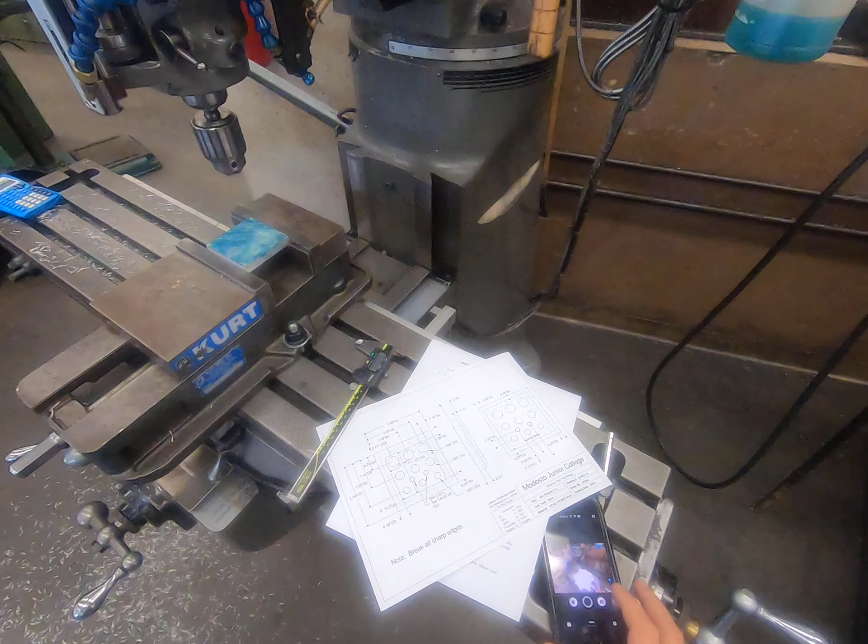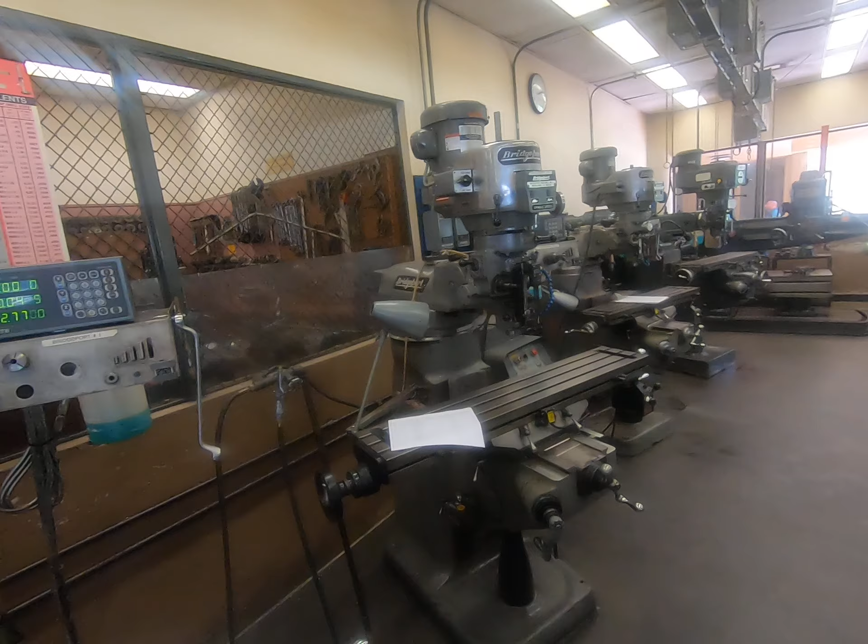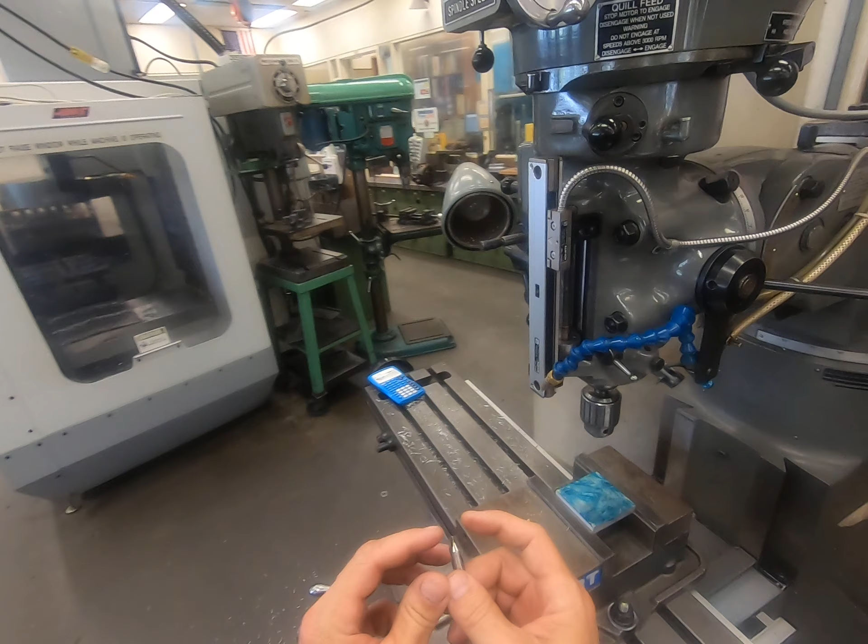As I was saying, we used the center drill on the big drill press when we drilled our hole in the plate. We're going to do the same concept right here, right now. So before we do any drilling, we're going to center drill first. When you center drill, you go through that pilot and about halfway into the tapered section.

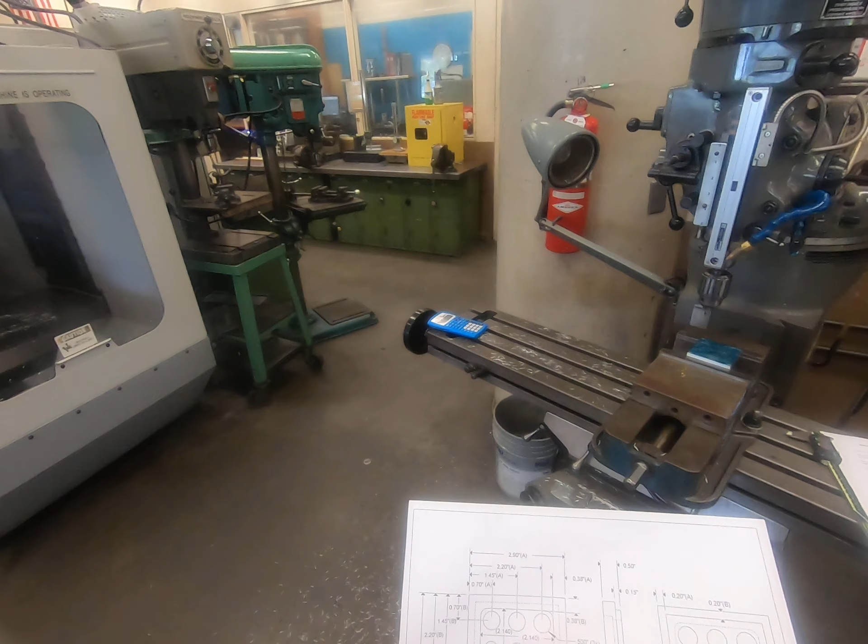I can hold this right in the drill chuck. Lock that down good, and now we're going to go to our first hole location. We can pick and choose however we want here. We're going to center drill all 9 of these holes, all of these. We could start down here and work our way back, or start in the middle and go out and come back down here. It really doesn't matter. I'm just going to start like the drawing does, in this corner, and work my way across, then come down and do them like that.

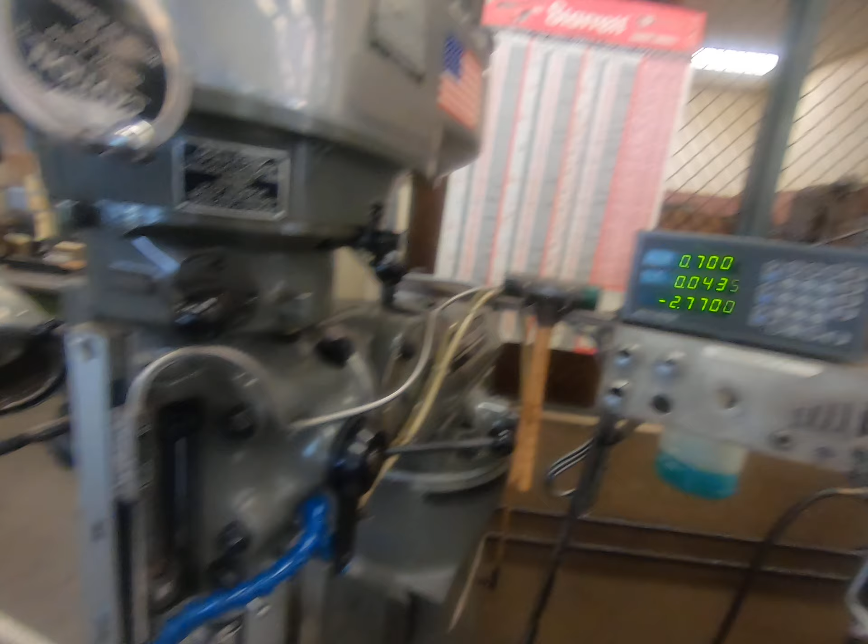My first location according to the drawing is 700 thousandths over and 700 thousandths down. So what I'm going to do right now is go over 700 thousandths on the digital readout, roughly there, and then on Y, come down 700 thousandths. We're going to do the same thing.

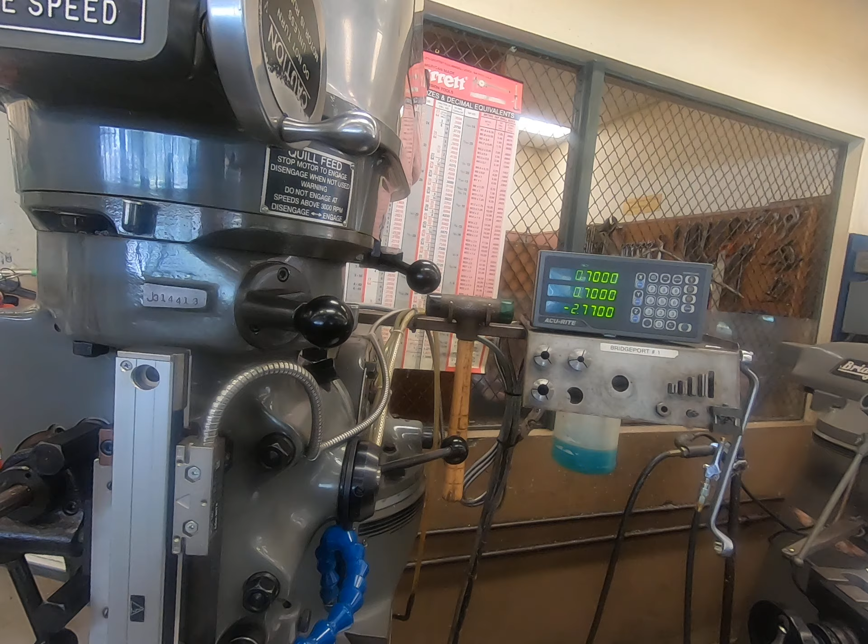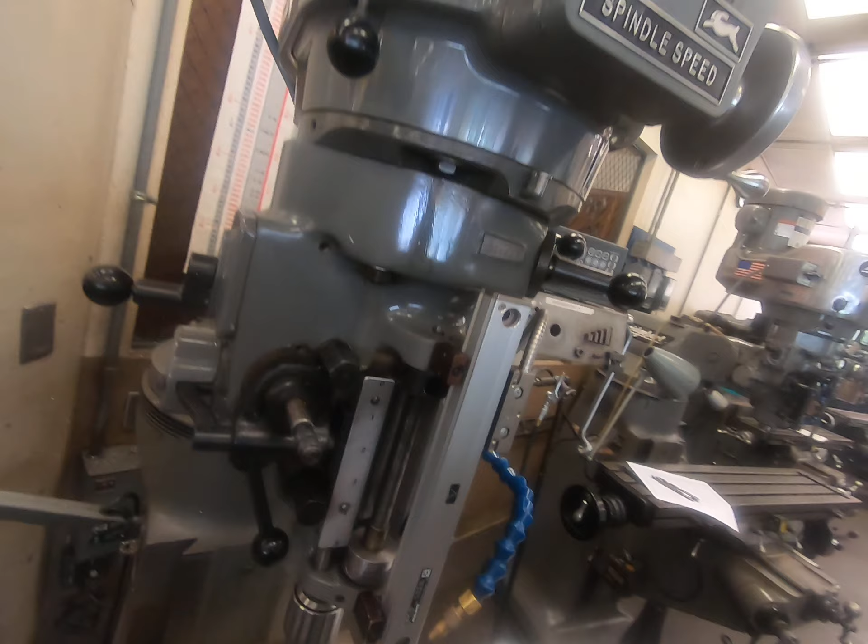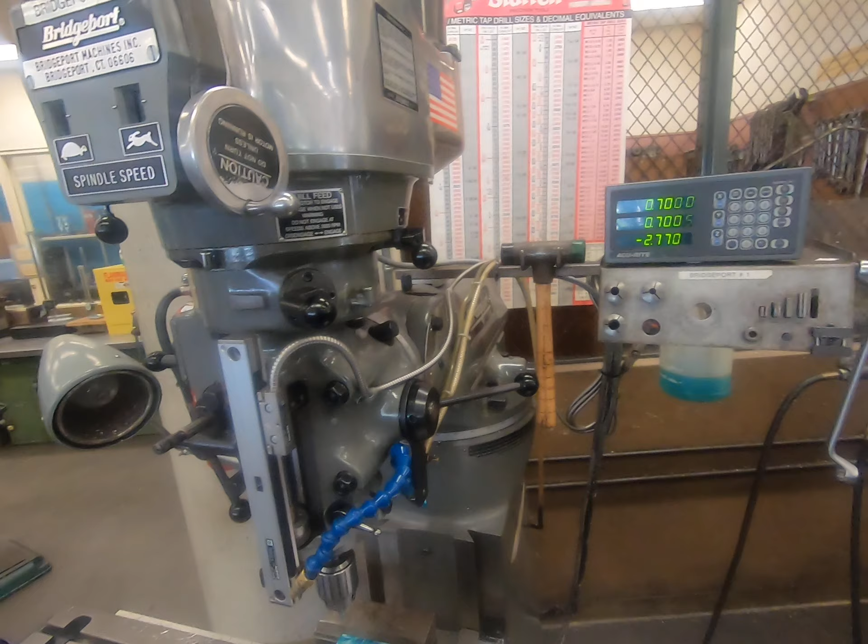Now, this is where if you wanted to, you can use your axis locks. So I can lock my X-axis down and my Y-axis. A lot of times when you lock it, it will jump like that, 5 or 10 tenths. If you're really crazy, you can go back and try to loosen that up and adjust it. So when you lock it, it locks right at 700. For me, I don't lose sleep about a half thousandth being off. If I was boring it right now, I might be more critical of it, but for drilling, we're 50 thousandths small anyway.

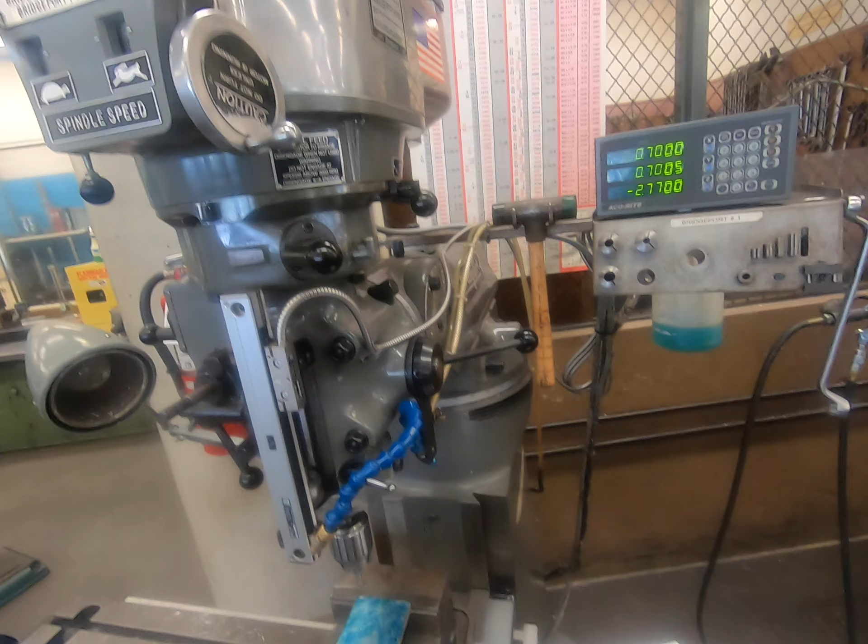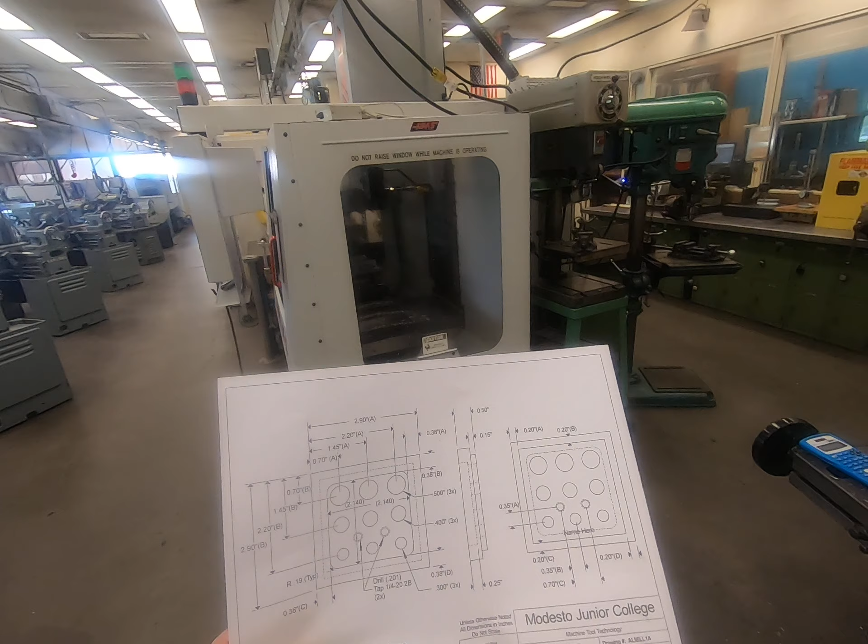I didn't explain that. The reason we're drilling these all 50 thousandths small is that the tolerance on these is a 3 decimal place tolerance, and on this blueprint, that's plus or minus 1/1000th of an inch. That's very tight, very hard to hit. That definitely cannot be hit by just using a regular drill bit. You're going to need a different operation than that.

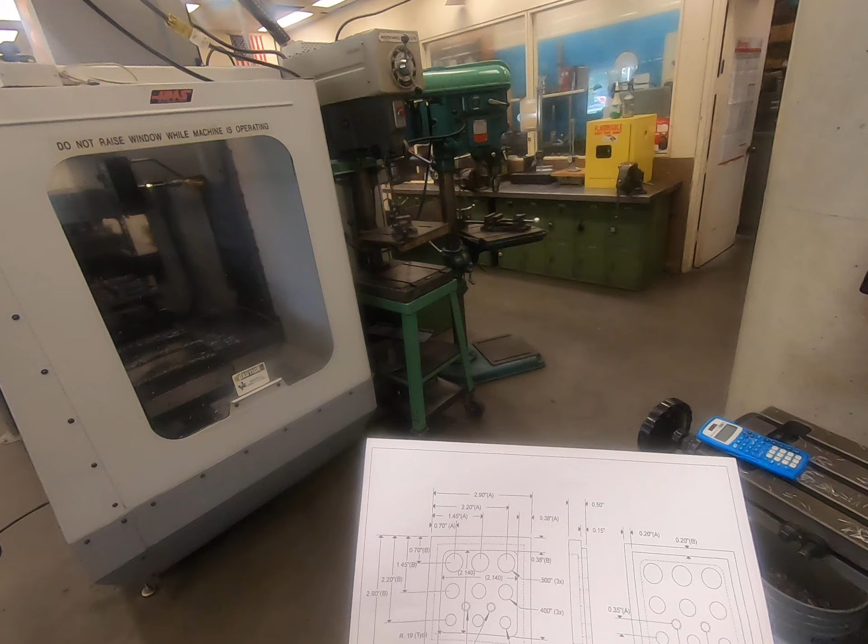In our scenario here, we're going to go through and bore each one of those holes out. That's why I'm leaving 50 thousandths small, so I can take that material out with the bore bar. That'll be the next operation as we go through here. So right now we're just drilling it - this is basically a roughing operation to create a hole in the location where we want it to be.

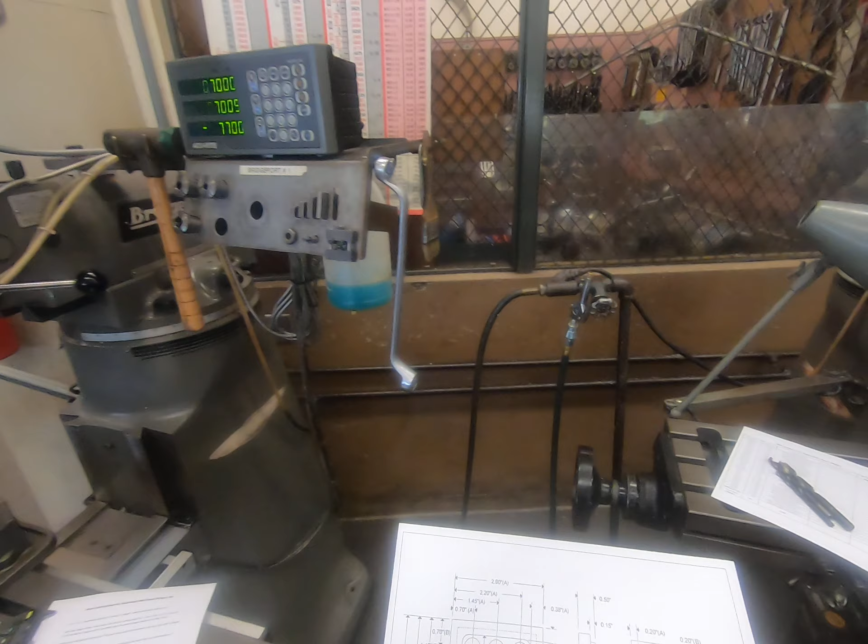If we were off on location right now a little bit on X or Y, even up to 5, 10, even 15 thousandths, it's not going to affect us much, because when we bore it, as long as we have it perfect then, the bore is going to create its own location - it's not going to follow that drilled hole. It's going to create its own orientation. So right now this is a roughing operation, making it a little small. We're going to come back and bore it out after.

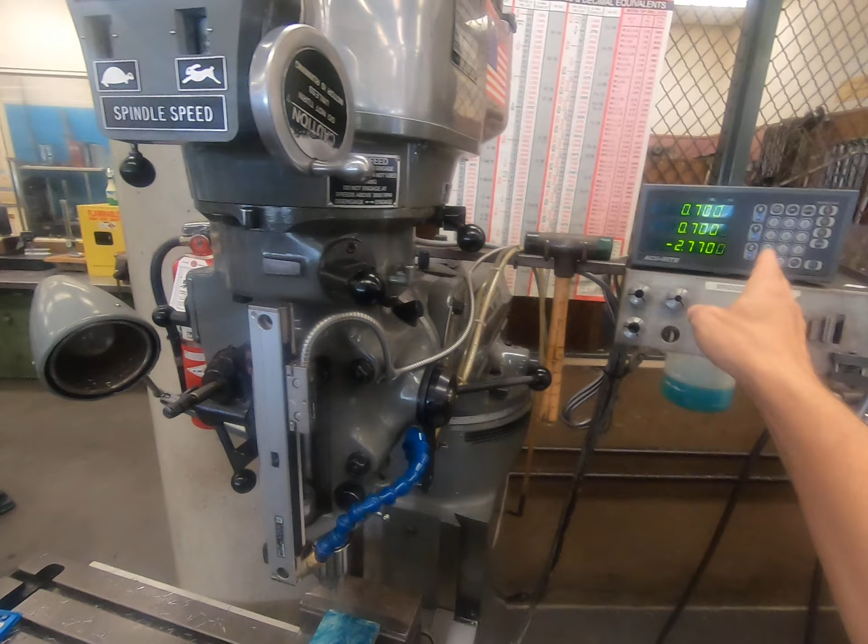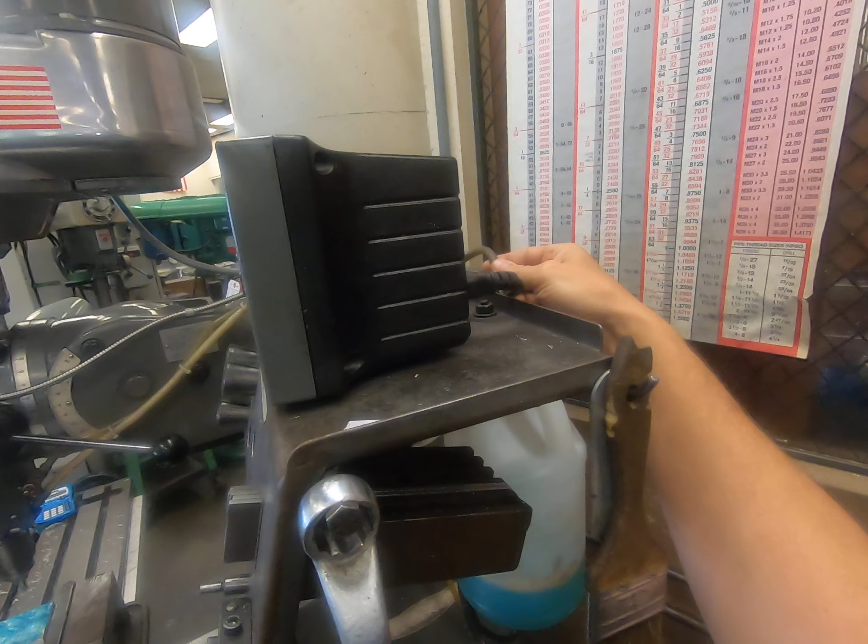For starters right now, I'm going to keep that close, because I'm going to need those numbers. So I'm going to 700 thou and 700 thou, and again, I'm not going to lose sleep about that, so I'll just leave it there. Turn this on, got some coolant. Potentially I'm getting a little low here in my tank, so it might not be drawn out. There we go, all right, we're getting some mist.

Oh yeah, I didn't show you this - one other thing is, remember the crosshair we put in there? Right now, that drill should follow along with that crosshair. Even if it looks like it's off, and it kind of visually looks like it is, don't trust it - that scribe line is not nearly as accurate as what this edge finder gets to. When you edge find and set the location like we did, we are within probably 1/1000th of where we want to be. It is very, very accurate. That scribe line is just a scribe line - it's not a perfect scenario. So the only reason I'd even have you scribe this at all is just for this.

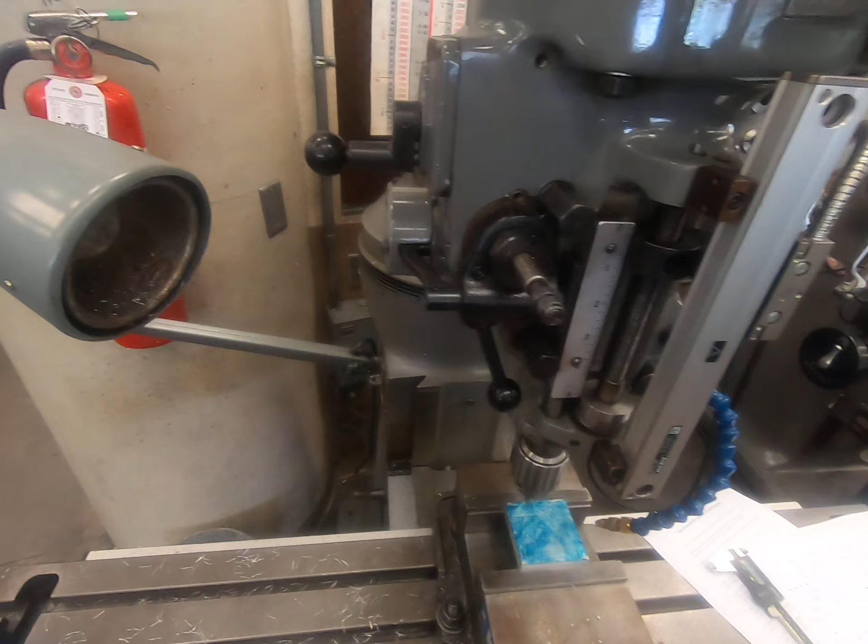A lot of times people forget to compensate for the diameter of the edge finder, and they don't move in that 100 thousandths. If you were to come here right now and see that your tool was off by basically 1/8 of an inch, it would be a red flag like, whoa, I did something wrong. That's the only reason I'm going to tell you to scribe even one hole. Otherwise, I believe in that edge finder way more than any of those scribe lines. Those are just there for moral support, you could say.

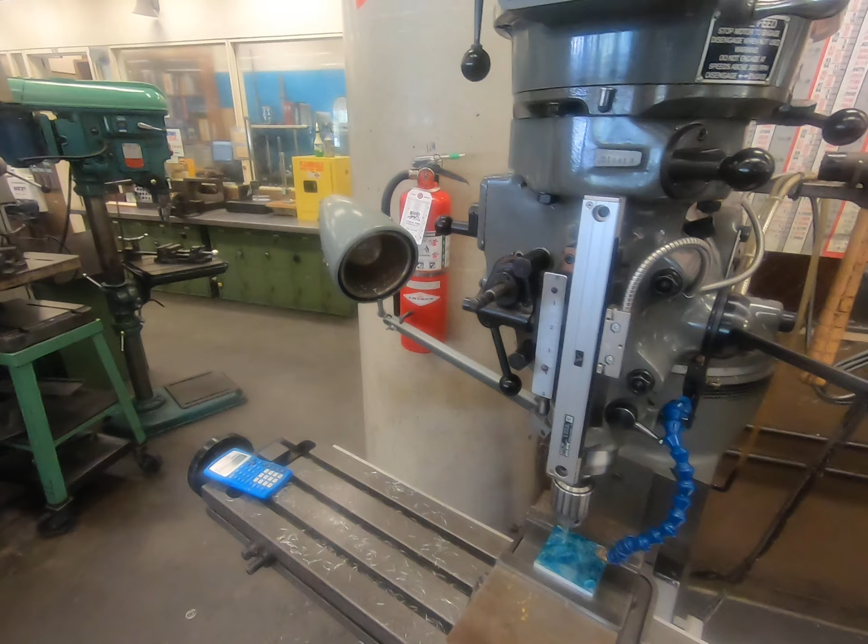So, all right, we're going to drill. RPM on this, I'm at 1,000 right now. For center drilling here, I'm not going to worry about it, that's fine. I could probably go faster if I wanted to, but this will work for what we're doing.

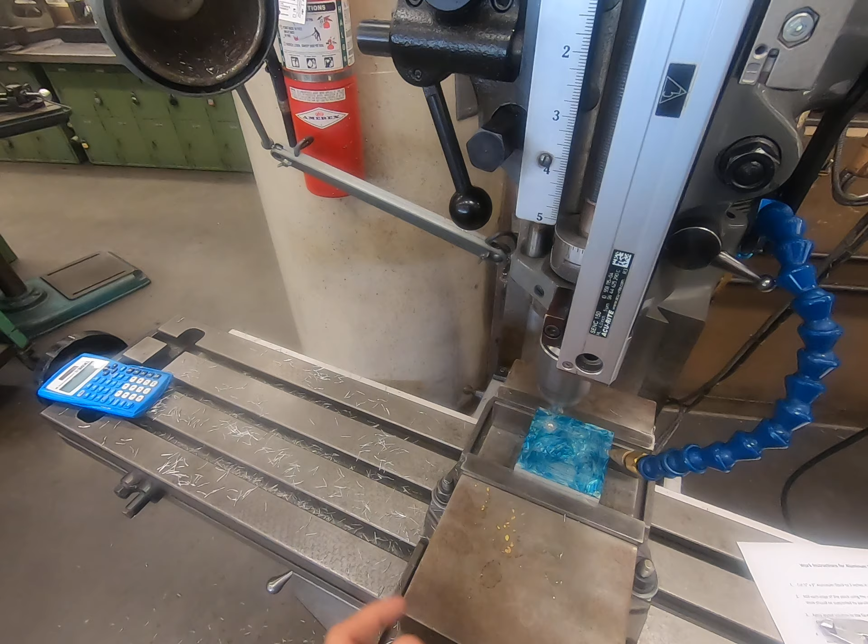There, I just went down. You can see I created a little bit of that chamfer, and that's as deep as I want to go. So I want all my holes to look like that. Now I just follow the orientation my blueprint says.

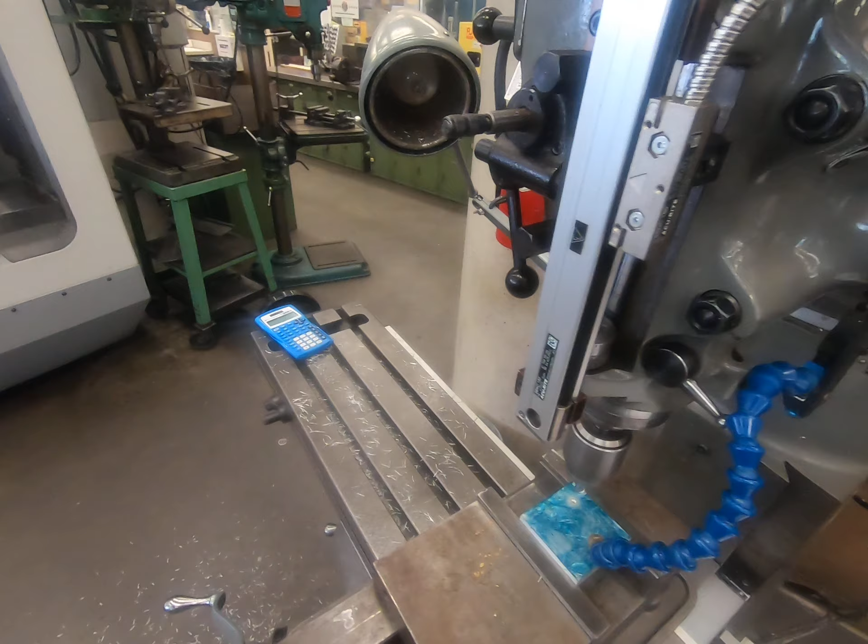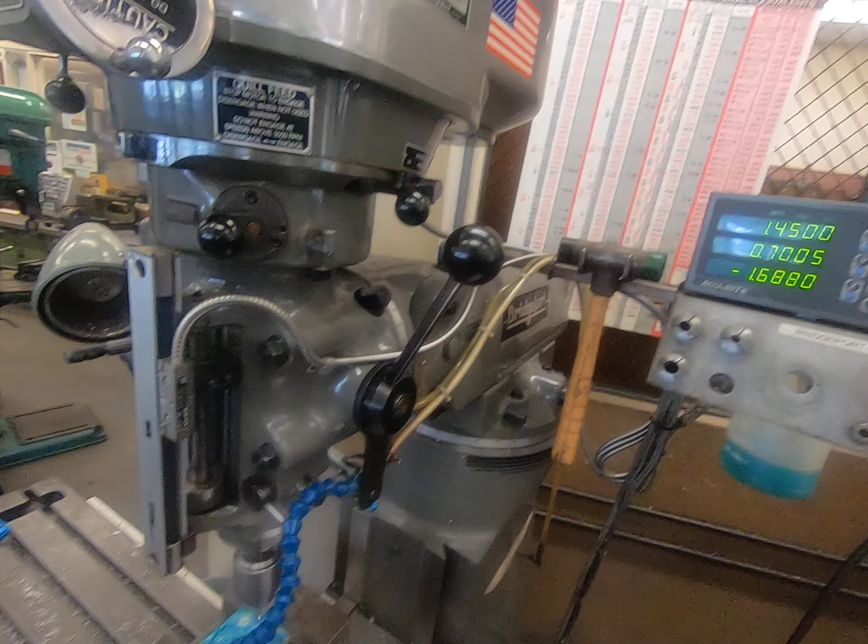The next hole is still 700 thousandths down, and 1 inch 450 thousandths over. I'm going to move my x-axis, unlock it, and move it over to 1 inch 450 thousandths. For what we're doing here, I'm not that worried, so I'm not going to lock each axis—you can if you want to. Matter of preference, it's not going to change much for what we're doing.

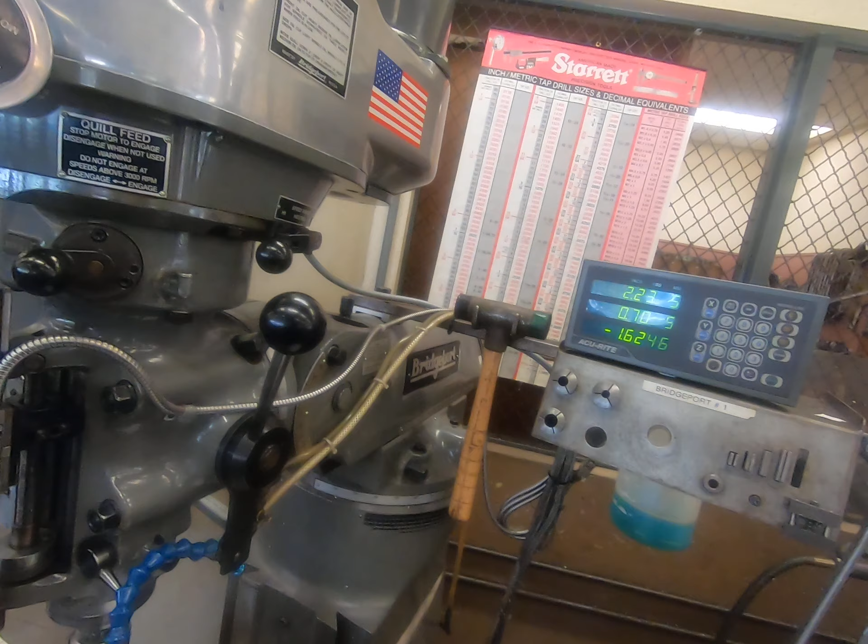So, 1 inch 450, I'm going to center drill again. A little deeper that time, but not a big deal. This time we're going over to 2 inch 200 thousandths, so I go to 2 inch 200. There we are.

Center drill again. Now I'm going to move down on the y-axis. I might as well stay at my same location because these are all in the same plane on y and x. So I'm going to stay at 2 inch 200, but move my y down to 1 inch 450 now. I'm going to loosen this up, go to 1 inch 450, and center drill again.

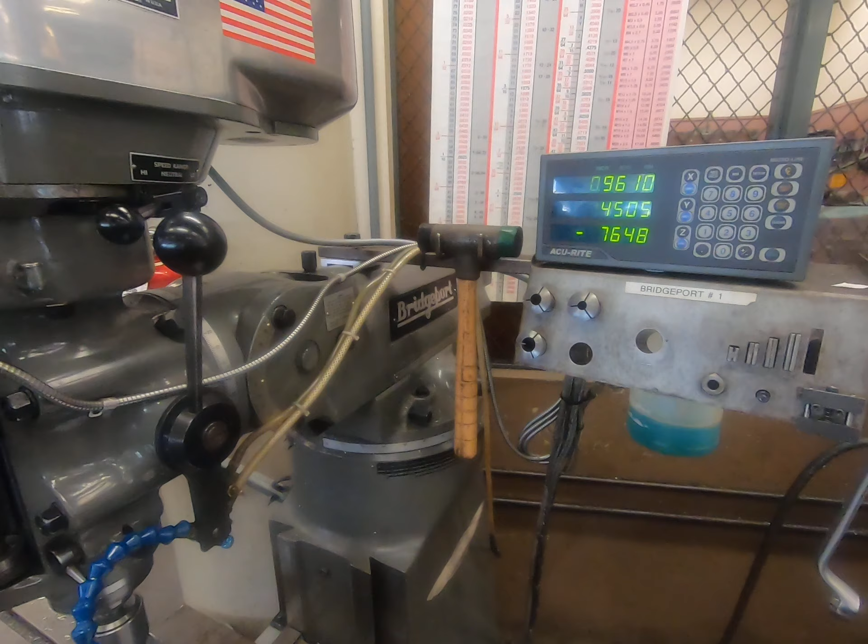Now I'm going to go back to 1 inch 450. And there we are, center drill that one. Then we're going to go to 700 thousandths again on X. It's beautiful edge finding because you can go to the exact numbers in your blueprint—no guesswork, no compensation, nothing—as long as you have it edge found correctly. Now we're coming down on Y, and we're going to go to 2 inch 200 thousandths on Y.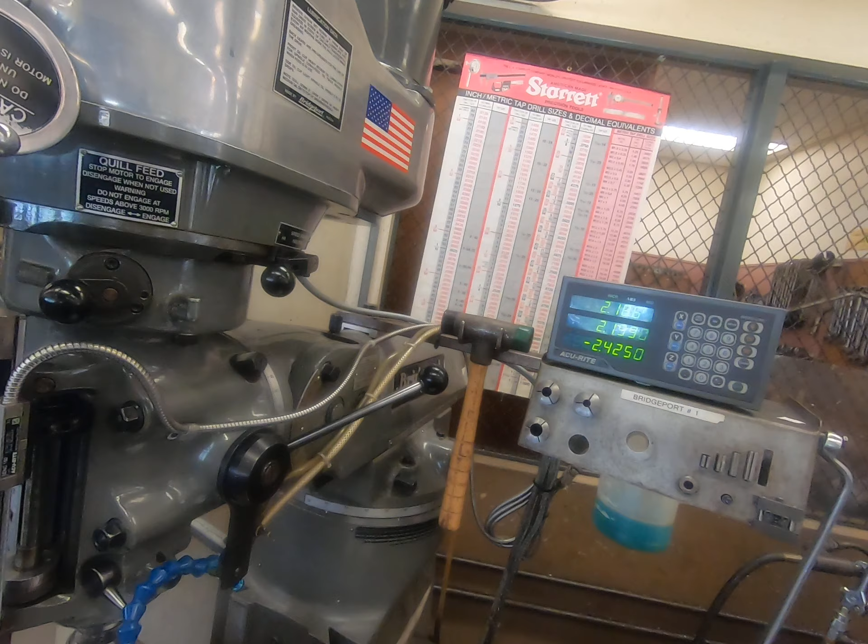So there we are, drilled there. Then we're going to 1 inch 450 on X. From there, finally we're going to end at 2 inch 200 and 2 inch 200. And that other one moved just a little bit on me now—again, that'll happen, a little foul, not worried about it. Try to get a little closer.

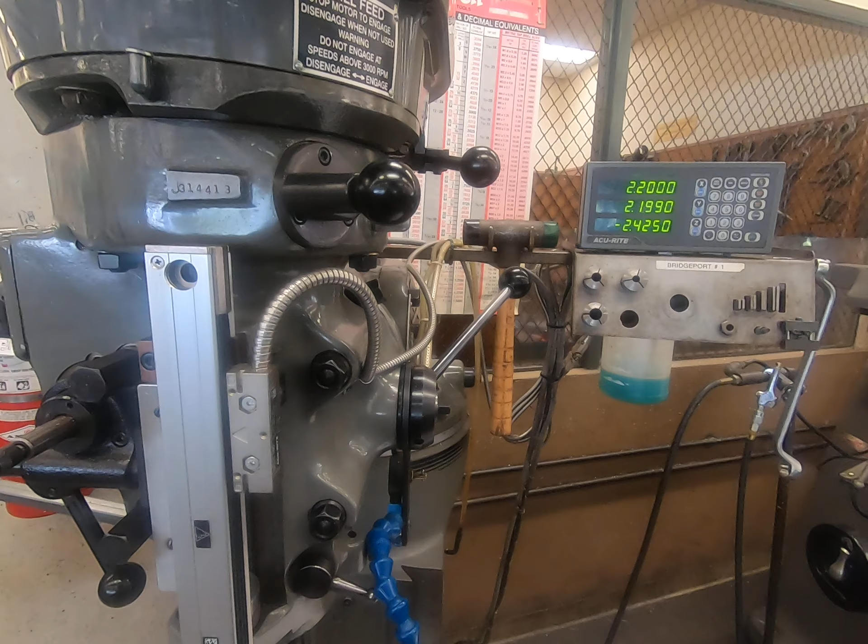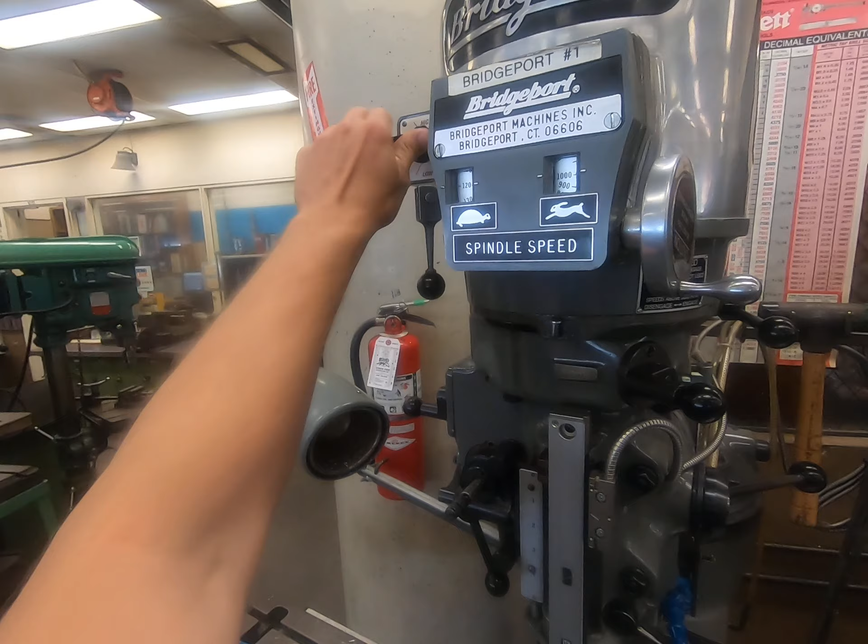All right, there we go. And down we go. So we went through and center drilled all of our holes. Now that's a guide for that drill to follow. So when you go to drill this, your drill is going to fall right into that little pocket, and it's going to guide that thing right through there, making your drill come out very close to size. So we're in location right now for the smallest holes, which are 300 thousandths.

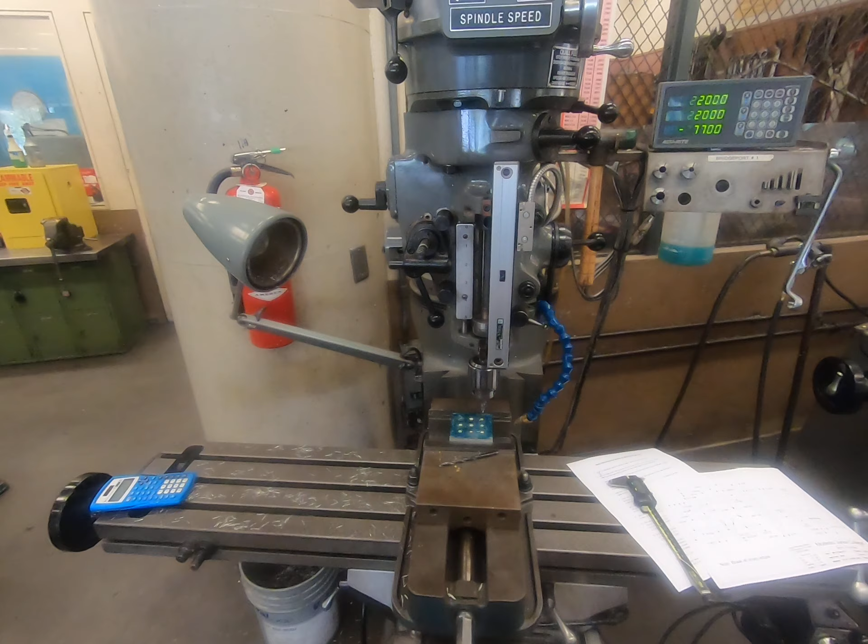Which we're going to drill at 250. So I'm going to start with this drill, and we're going to knock out each one of these holes. It's always a good practice to go through—if you center drilled this part, you should go through and drill it in the same work holding.

If you were to go right now, and the buzzer goes off, time to leave for the day, you pull that part out and put it back in and edge find it all—sure, you're going to get it very close, but you're still going to be off a little bit. Whenever you put a center drill into place, it's nice just to get that drilled hole right through in the same clamping and the same zeroing on the DRO, just to ensure you're perfectly there. So it's just good practice.

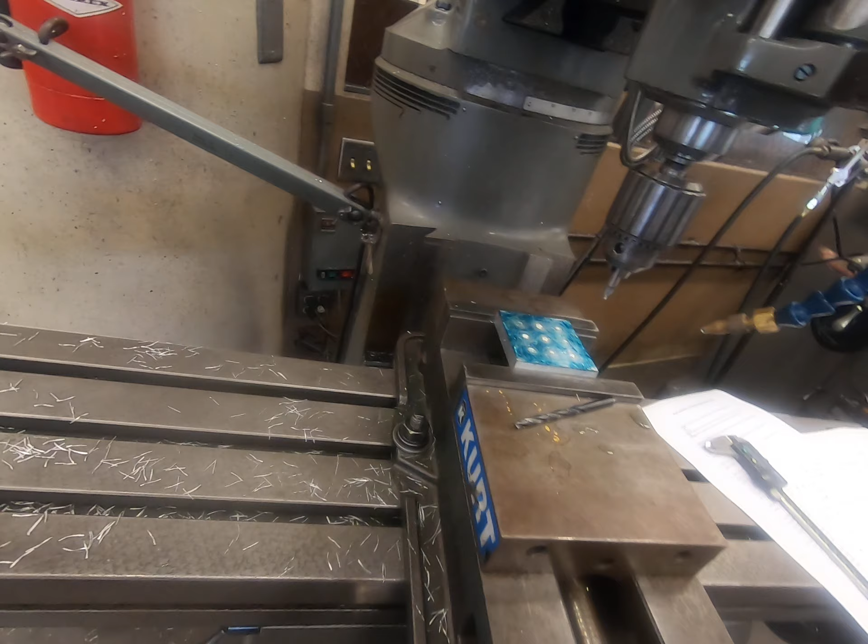All right, so I'm going to drop this knee just a little bit so I have room for this drill to go in there. And that should work for what we're doing. And we're going to take out our...